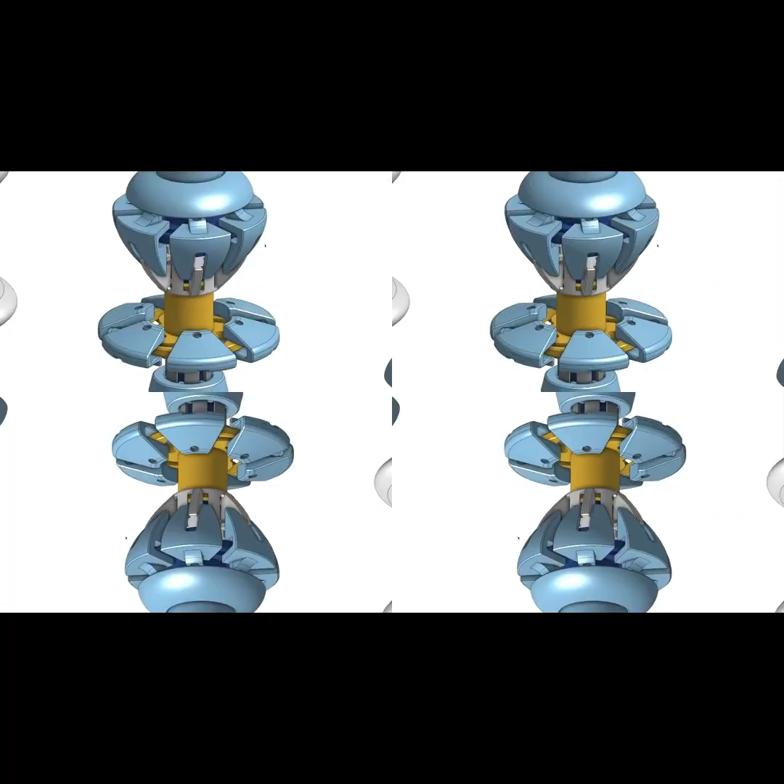So for the past 6 months, I've been designing, prototyping, and testing a transforming pawn that, if successful, may surprise a few players and even be something you can add to your own game of chess.

This all started earlier this year when another creator named Polyfjord uploaded a video where he designed and animated a pawn that transforms, or self-promotes, into a queen. If you haven't seen it, I highly recommend checking his video out. It was such a cool concept that I knew I had to make it for real.

My plan is to do just that: design a real pawn that can rearrange its parts to form the silhouette of a queen. And because there are instances in chess where you may not want to be promoted to a queen, whatever we come up with should give us a good base to eventually build the other pieces as well.

This project is inspired by Polyfjord's video, so like him, I'll be using a Staunton No. 6 pawn and queen as reference. Luckily, they both have similar features to each other, which should make it easier when we start to break this down. First, there's the obvious height difference.

The pawn has to grow vertically to match that of the queen. There's also a diameter difference, where almost every feature of the queen has a larger diameter. And finally, there's the question of how to activate this transformation, and how we're going to hold everything together.

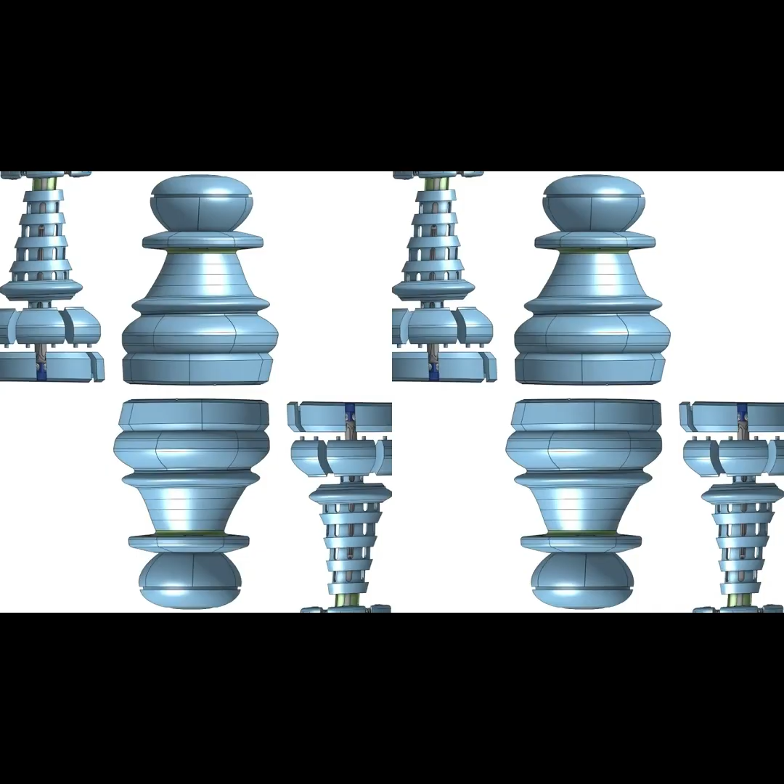Now when I said it took me 2 weeks, what I meant was animating all of that. I haven't actually made anything yet. But what you might have noticed is that this whole thing got a lot chunkier, which is also bad news. In order to fit all the springs and mechanisms in there, I had to keep increasing the size of the pawn. I'd like to decrease the size of this, but first let's see if any of this actually works.

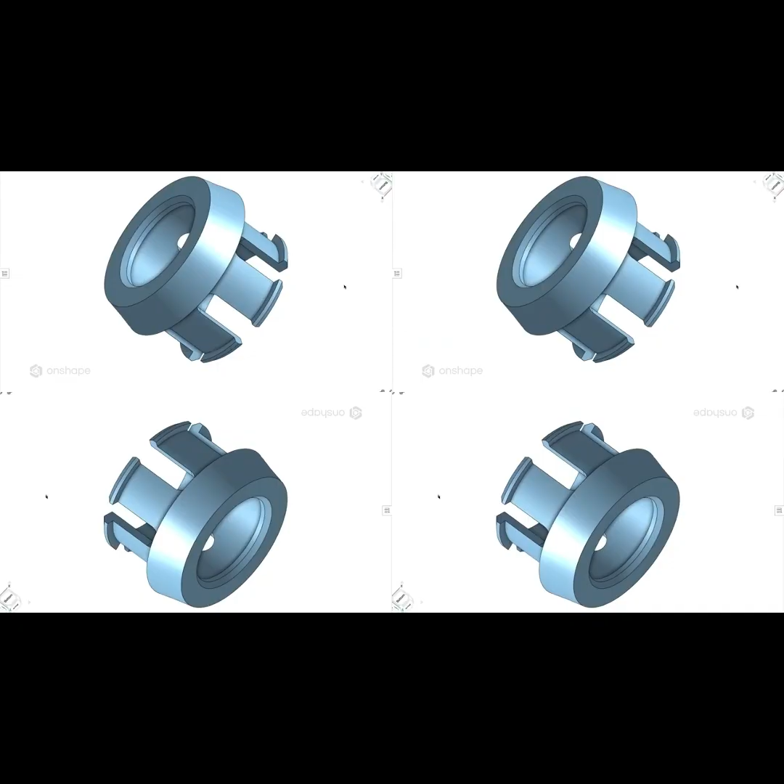So I've finally got some functioning parts, but 3D printing this from resin isn't my intended material. I've designed most of this to be CNC machined, so I've got dovetail joints and cylindrical features all over this. But since I don't have any CNC machines, I've reached out to the team at Proto Labs, and they've agreed to help me with some of the design process and material selection.

So after reviewing my design with some of their engineers, we've decided to move the goal back towards 3D printing. That's because the cost of some of my parts to be CNC machined was just going to be way too expensive, especially if I want to make more than one revision of this.

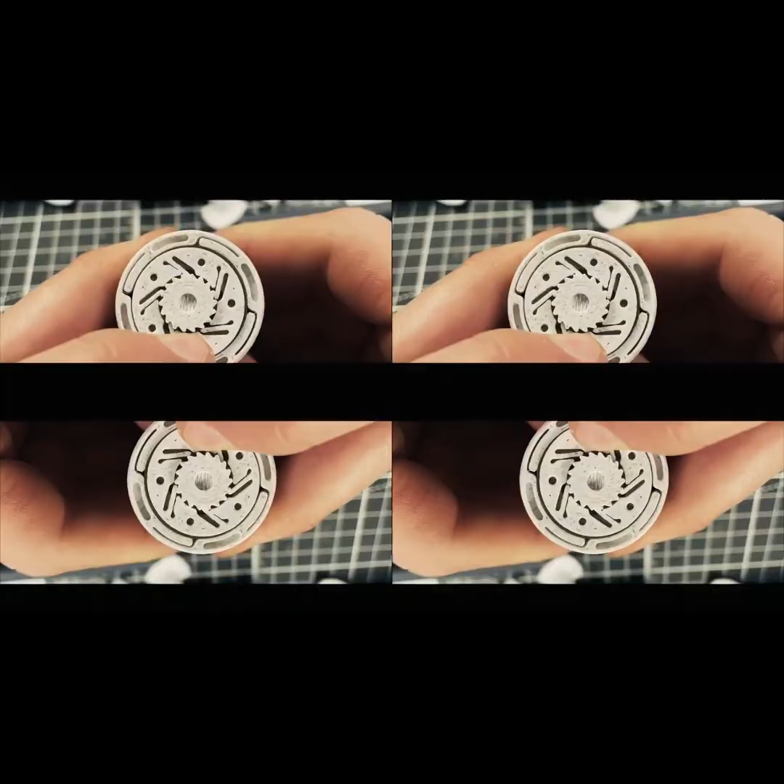After that mess, I went to take a break, and that's when I came across a video that crushed any motivation I had left. I wasn't able to get permission to show it here, but I'm sure most of you've seen this by now and probably been yelling at the screen about how this has already been done before. The creator, who goes by Pig Millionaire, made a 3D printed pawn that, with a couple twists and an extension, converts into a queen. I'll admit it's pretty cool, but I can't help but feel defeated at this point.

So I switched gears for the past few months and made an unpickable lock instead. If you enjoy locking mechanisms, fun animations, and a redemption arc, go check that video out. Anyways, this break helped my brain reset, and I'm coming back with a fresh perspective.

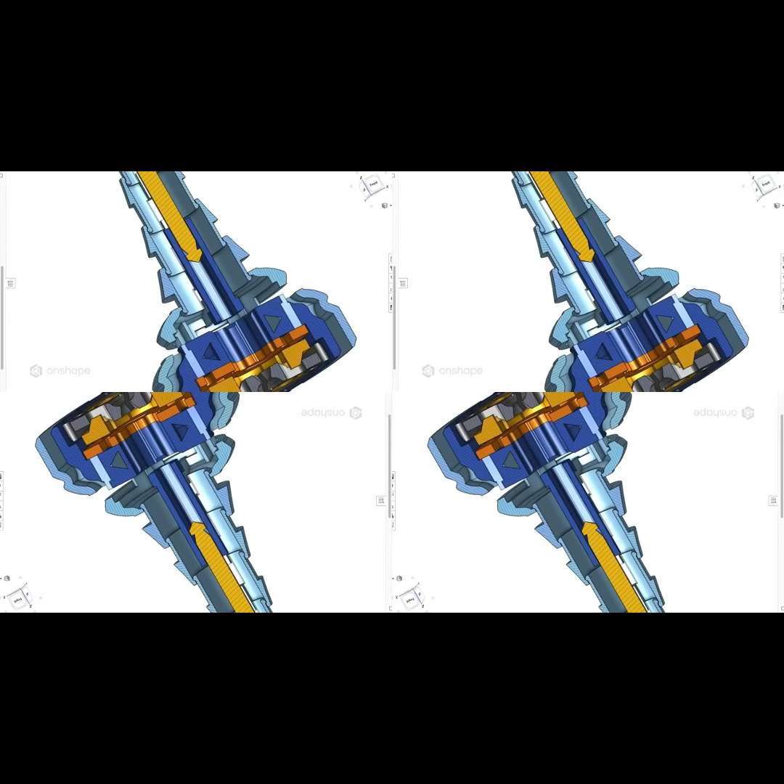I think I'm really close. I just think the spring was a little too powerful for some of these 3D printed parts, but I'd like to keep this design as accessible as possible with as many 3D printed parts as possible. So I went back into the CAD file, removed the clock spring, remodeled a few internal pieces, and switched back to a compression spring.

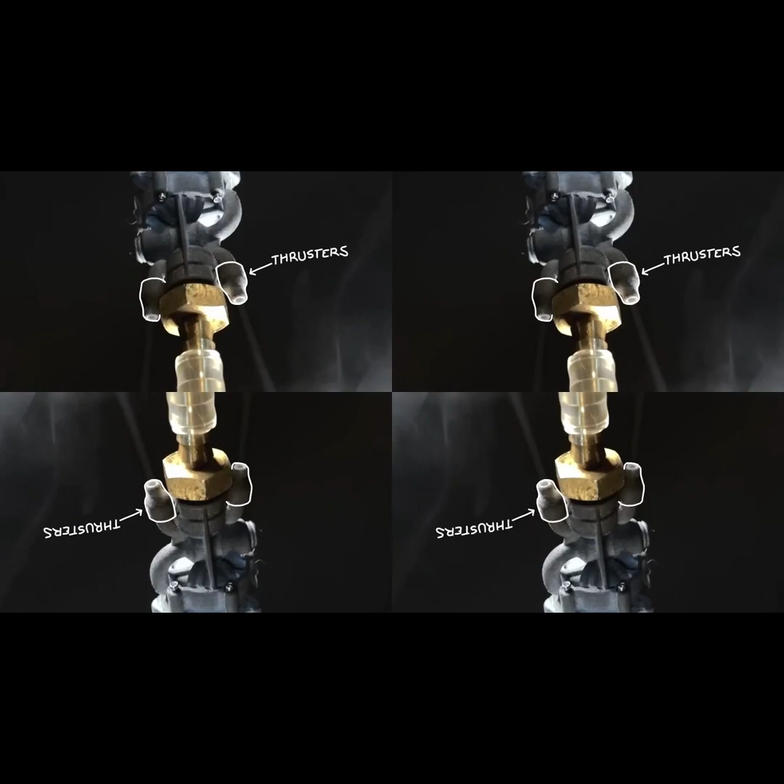This small mechanical bird is about to take flight with flapping wings, mini thrusters, and an air motor spinning at 16,000 times per minute. In case you're not familiar, an aircraft that flies by flapping its wings is called an ornithopter. These exist, but they fly horizontally, so to make it challenging, I'm going vertical — an aircraft that hovers like a hummingbird. But before anything could take flight, I spent months designing and testing countless wing variations. I developed and built what may be the world's lightest air motor, and I studied hummingbirds for more hours than I ever previously would have wanted to.

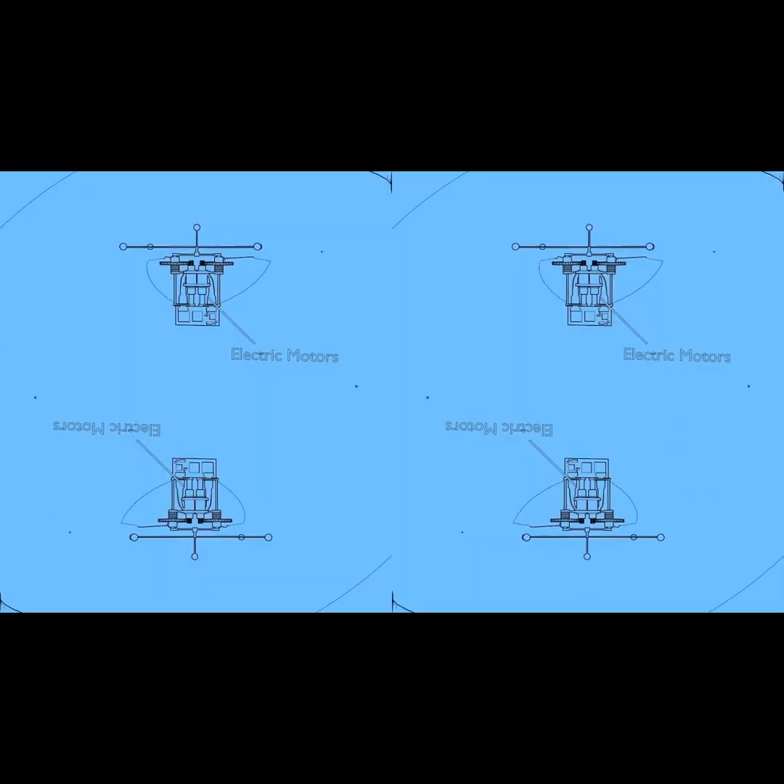All of this would become the most dangerous, most expensive, and most rewarding project I've ever attempted. The plan is to build an ornithopter that flies vertically. There are a few projects that have done this before, but those run on batteries and electric motors. Since I'm not electrically inclined, I'm going to make one that doesn't use electricity at all. Should be easier this way.

I needed to start somewhere, so I set up a few cameras near a feeder, and I waited. I kept waiting until I saw my first chance. It was a little camera shy, and then I had trouble staying in focus. Other times they like to do little flybys as if to mock me. How do bird watchers even do this?

But eventually I was able to capture some on video, and then in slow motion. But even at 250 frames per second, I could barely tell what was going on. Luckily there's a world of stock footage out there, and I'll give this one a moment.

This tells a whole story that was invisible to me before. The way they're able to flip their wings to generate lift on every beat, the way they can keep their heads almost completely still, and how the wings even seem to follow a figure-8 pattern.

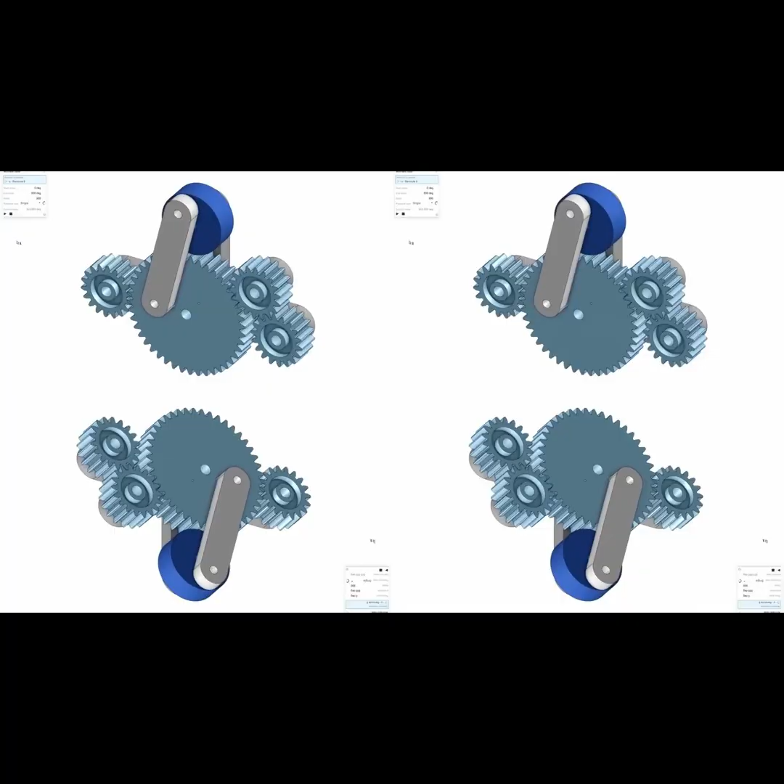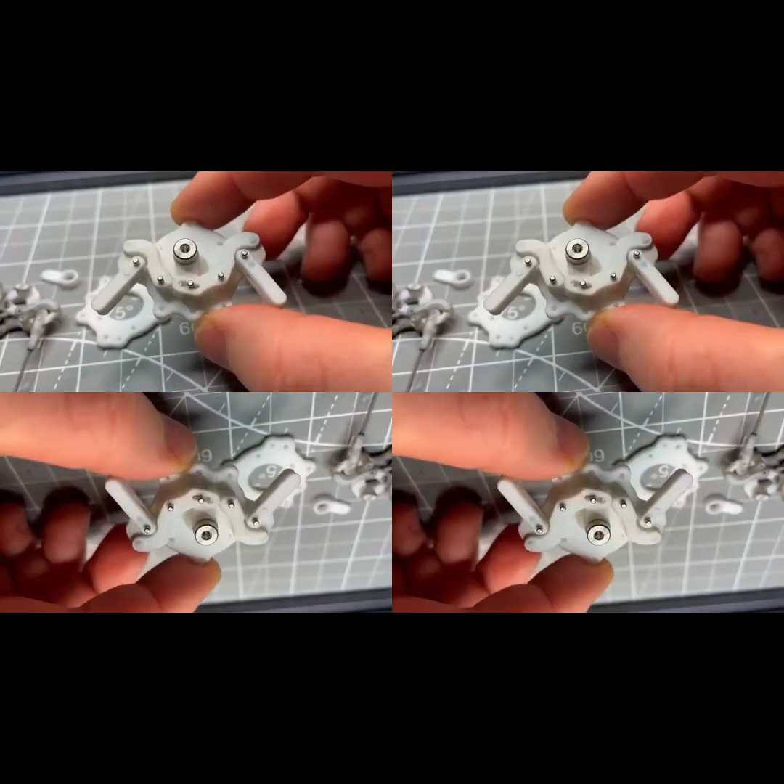After many iterations, I landed on this leverage linkage system. Assuming the power source will output a rotational motion, I have to transfer that into an oscillating movement. First, the rotation is passed onto this crank that pushes a pin up and down in a slot, sort of like a piston engine. Then there are two opposing lever arms that carry the movement of the pin outward, amplifying the range. Finally, there is a small linkage that connects these lever arms to the final piece of the armature, allowing for about 130 degrees of wing pivot.

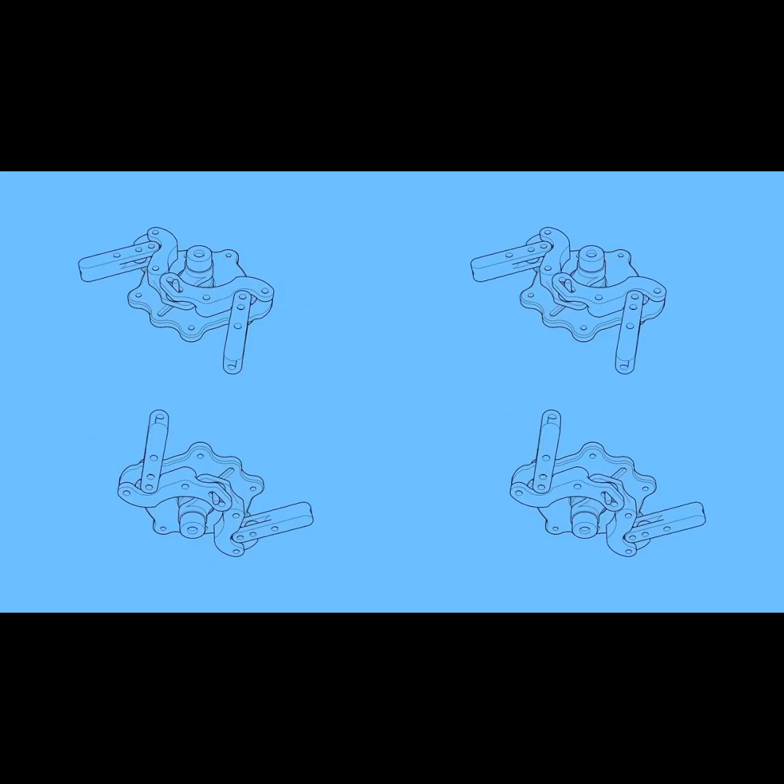Step 2 in the plan is the power source. It needs to output rotational motion and not be electrical, so my first idea was to use a tape measure. Not literally, but the tape measure is what's called a constant force spring. Unlike most springs where the force increases with the distance of compression or expansion, a constant force spring would provide the same force no matter how far it was extended.

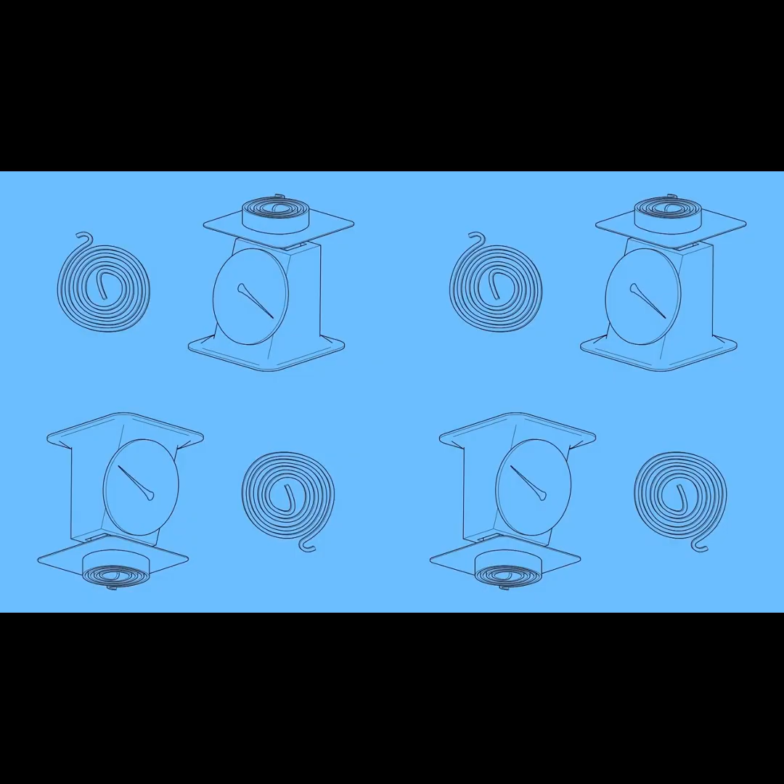Finding a spring that was strong but light enough to power the entire system proved to be harder than expected. As the strength of the spring increases, the thicker the band needs to be, making it heavier, meaning we need more power to lift the additional weight, meaning we need a thicker band, making it heavier again. It started to feel almost like the rocket problem, only mine was never going to take off.

After taking a mental break, I reevaluated my situation. If I were to produce the power and speed necessary, I would need something much more power dense. It turns out I have a lot of these lying around.

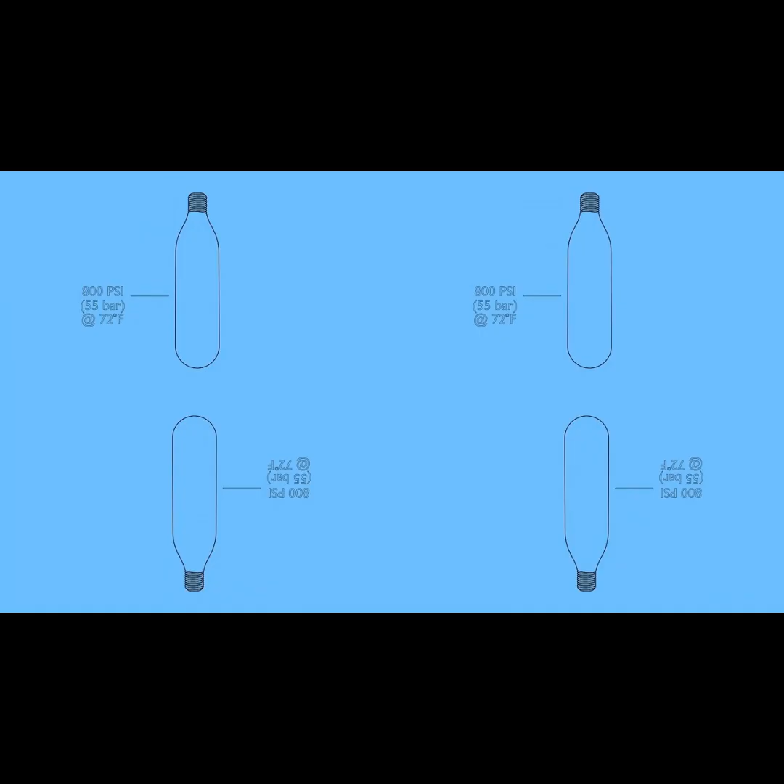These are carbon dioxide cartridges. Weighing in at only 60 grams, these canisters hold about 800 psi, and I could potentially use the air pressure to rotate the wing mechanism, and even use the expelled gases as added thrust. Since they had enough power to lift themselves, and then some, I was starting to feel optimistic again.

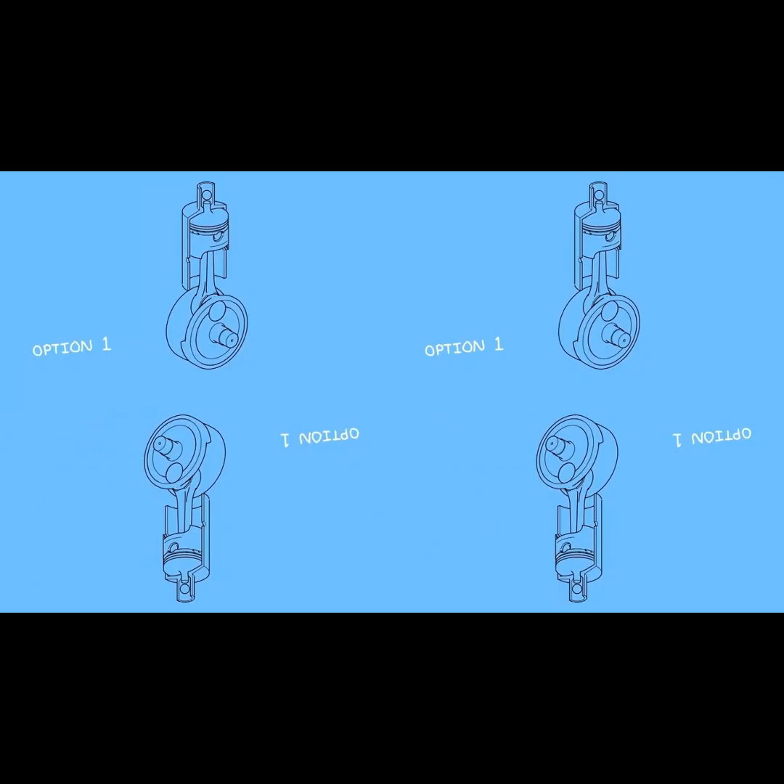Now I had to figure out how to turn all this pressure into something that would rotate the wing mechanism. One option is a piston motor, where the pressurized gases push a piston, which in turn pushes a connecting rod to rotate the crankshaft. Another option could be a turbine, where those same gases pass over curved blades, which capture that energy and turn it into rotation.

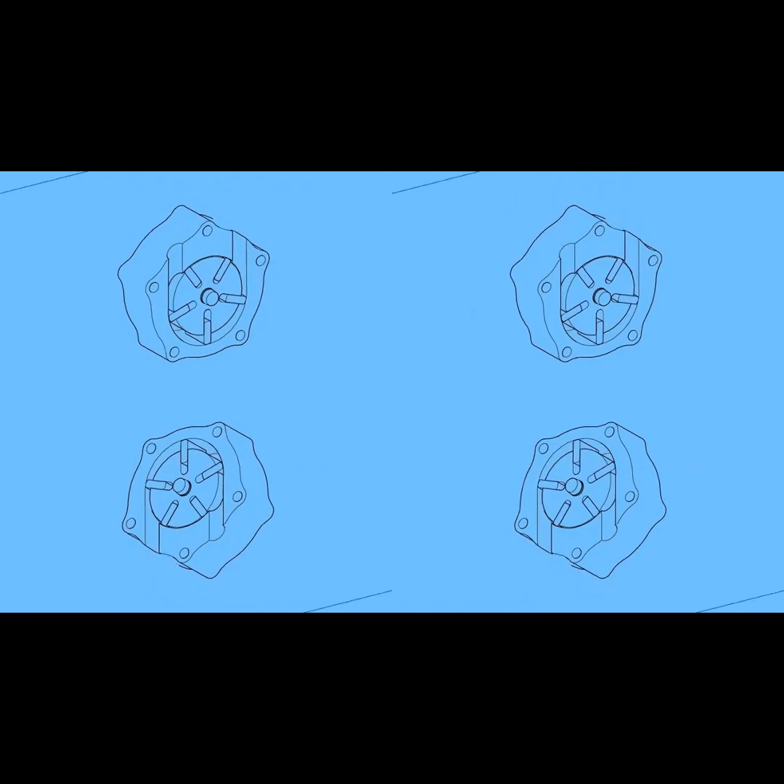Finally, we have a combination of the two. This is a rotary vane motor that works sort of like a turbine, but the blades are in contact with the outer wall, forming closed chambers like the piston engine. As the air starts to rotate the blades, the offset of the rotor in the housing allows the chambers to expand with the compressed air, assisting in that rotation.

As I didn't want to design a motor completely from scratch, I ordered this little CO2-powered piston engine. After some testing, I soon realized I needed something more compact and with higher torque or higher speeds. And I lied. Of course I want to design one from scratch.